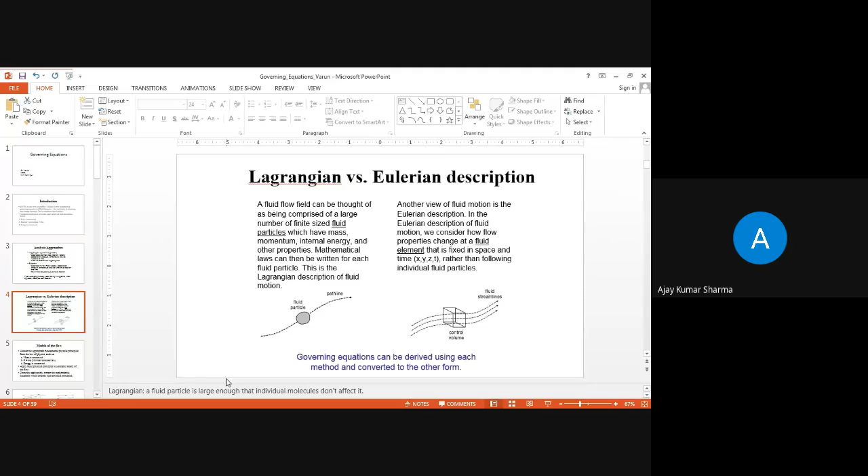In space and time, X Y Z, rather than following individual fluid particles. So these are the basic differences of these two approaches by which we can analyze our fluid.

So models of the flow choose the appropriate fundamental physical principles from the laws of physics, such as mass is conserved, Newton's second law, energy is conserved. Apply these physical principles to a suitable model of the flow, and from this application extract the mathematical equations which embody such physical principles. Based upon those physical principles the equation can be converted into a form by which we are able to solve.

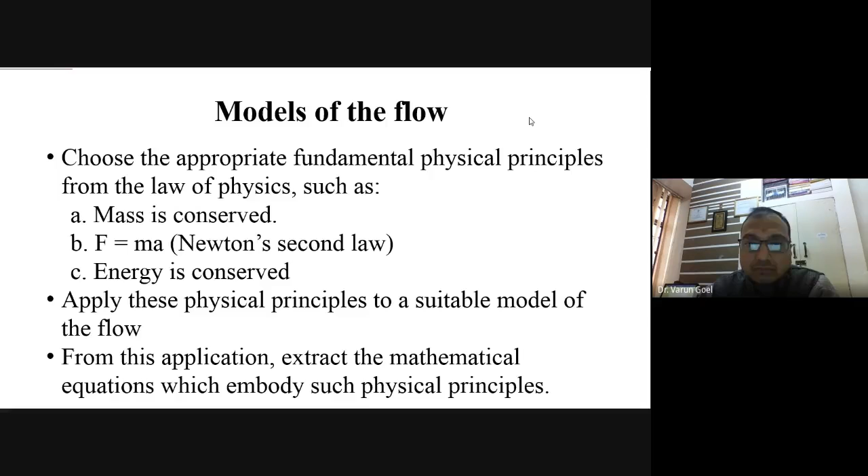So these are basically 4 models. Based upon these 4 models, we are able to solve or model our physical phenomena into a set of mathematical equations.

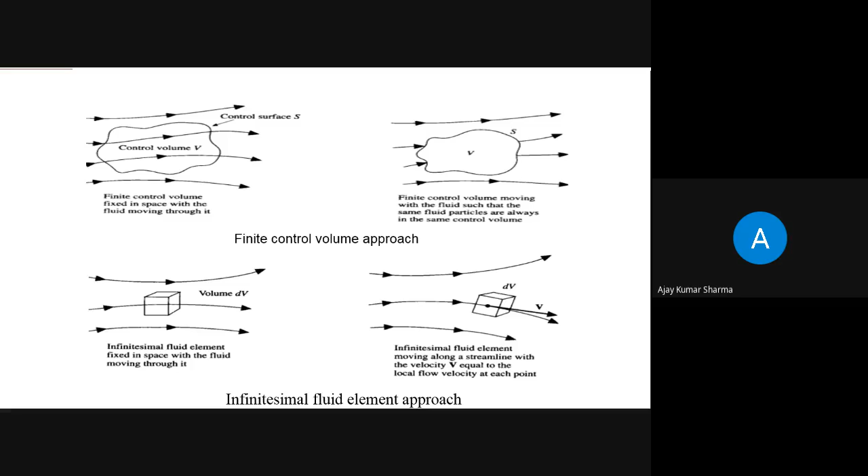Please write, anybody having any idea? Mr. Manoj P. Mahore says integral as domain irregularities can be captured. Okay, let's discuss.

So you can use both the methods, but integral form of equation is generally considered the pure form of equation, because in the differential form there is an assumption that the function is continuous and differentiable. So if at any place a discontinuity is there, our differential equation will lead to certain errors. So we can say the integral equation is valid even when discontinuity is there.

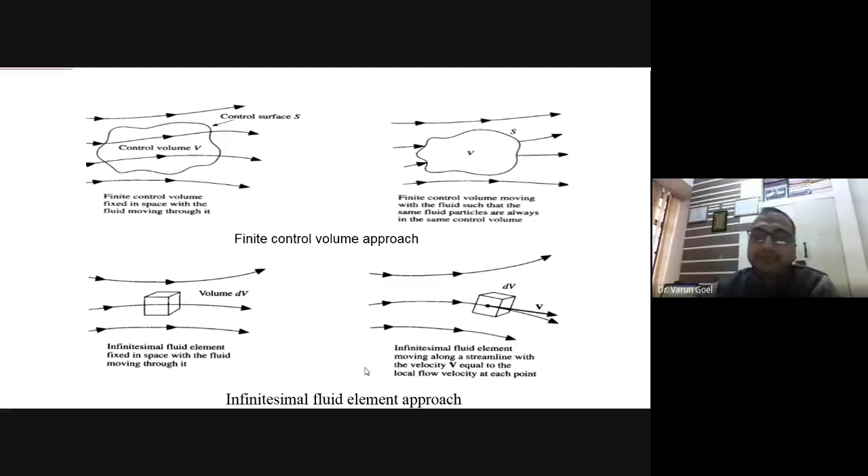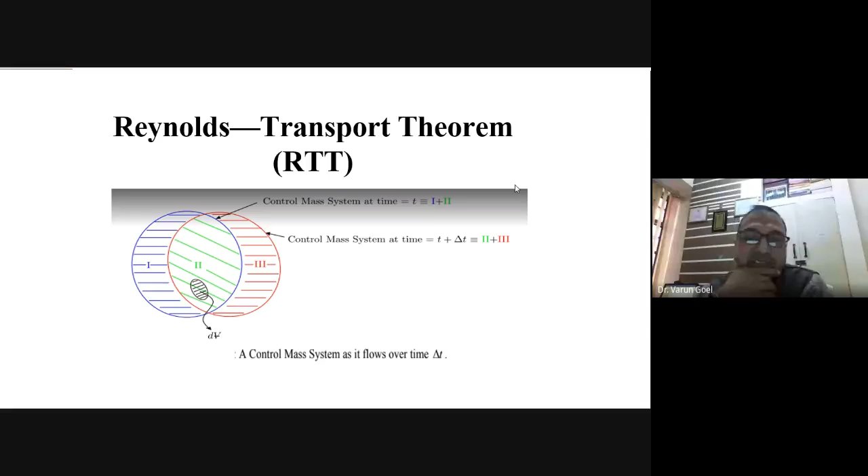So normally we can say the Reynolds transport theorem is a method to convert one form of system into another. So that is the Reynolds transport theorem.

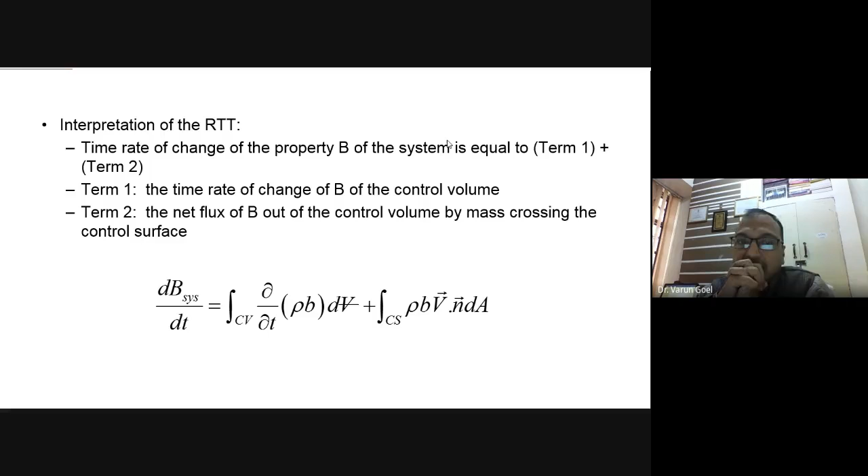If you say an interpretation of that, the time rate of change of the property is equal to term 1 plus term 2: the time rate of change of that property B of the control volume plus the net flux of B out of the control volume by mass crossing the control surface. It means the net rate of change of any property in the system will depend upon the time rate of change and the net flux crossing the control surface.

That is how we derive the continuity equation: the net mass flow out of the control volume through the surface is the time rate of decrease of mass inside the control volume. Whatever mass is coming out from the control volume is equal to the time rate of change in the mass inside the control volume.

So for different models, we have different representations of these equations. The net mass flow out of the control volume through surface S, which is the time rate of decrease of mass inside the control volume, is del by del t of a volume integral of rho dv plus surface integral of rho v dot ds, equal to 0. These equations are more or less the same thing, but written differently.

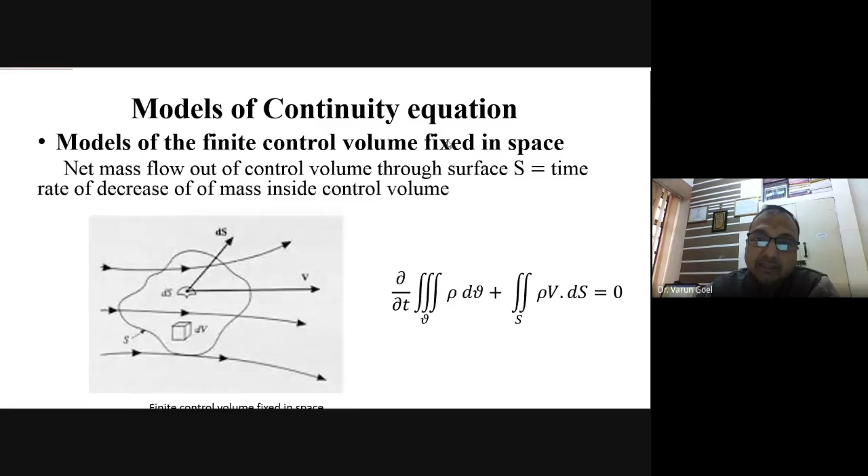So one is the integral form, a conservation form. Another is the integral form in non-conservation form, which is capital D by D t, a total time derivative of the volume integral rho dv, equal to 0. It means the net rate of change in the mass is equal to 0. Then we have the conservation form: del rho by del t plus del dot rho v equal to 0, in differential form, conservation form.

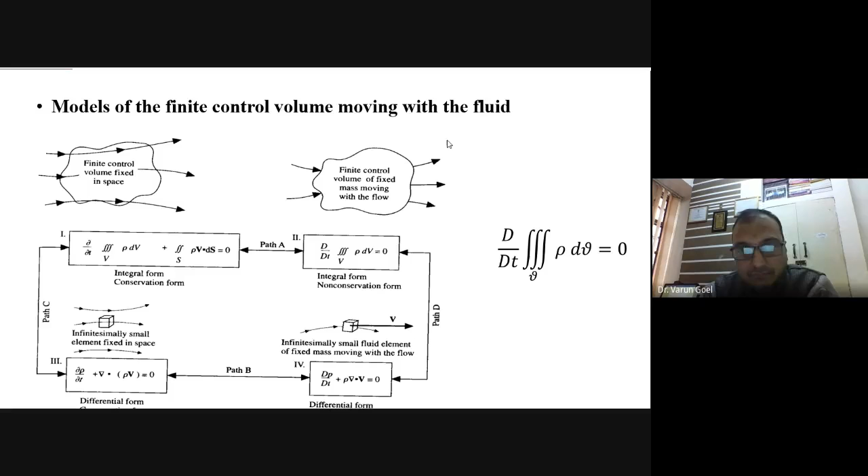Then we can say D rho by D t plus rho del dot v equal to 0, which is in the differential non-conservation form. We can convert between them by doing certain manipulations of the terms, and depending upon our choice, we can program these particular equations.

So if you write del rho by del t, you can simply add up all these components, and say all these changes are equal to 0. Then we get this type of equation, del rho by del t plus del dot rho v equal to 0.

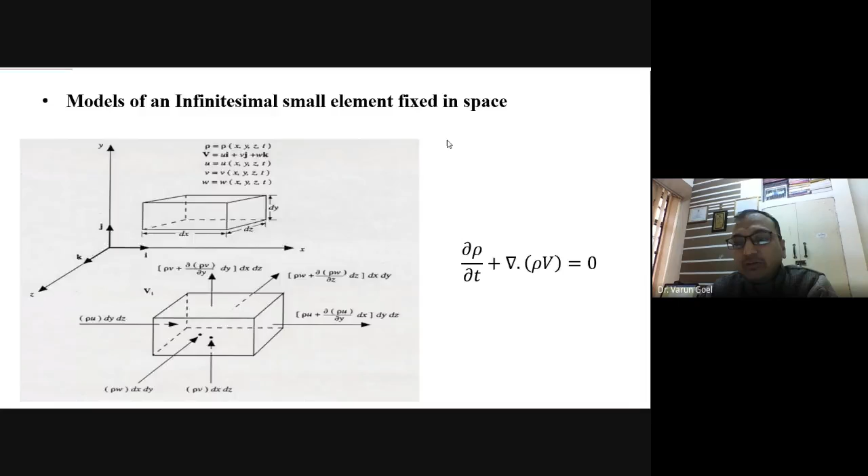If we go by the change in delta mass, the total derivative for this change in delta m will lead to this capital del rho by del t. So this is how we derive these generalized continuity equations. We have represented them in 4 forms for different models, depending upon whether the control volume is fixed or moving, or a small infinitesimal element is fixed or moving. Based on that, we can find out these equations.

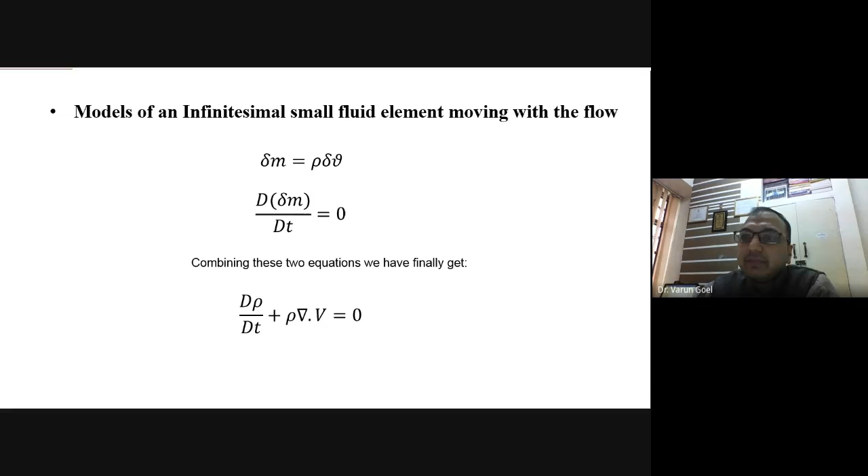And again, when we are interested in solving those equations, we will use them as per the requirement. Now, the momentum equation. Just a minute.

So now the momentum equation - we have to come up with the forces, all types of forces which are acting on a surface, which is equal to the net rate of change in rho dv by dt equal to the change in force.

So now we have body forces, surface forces, and other forces, which may act as a source - for example, if some magnetism is there, we have electric current, EMF, any other kind of force acting can also take place in this equation. The forces acting over the surfaces are called surface forces, and the forces acting over the body are called body forces.

So we know gravity is the body force. You can say pressure, stresses, and other forces depending upon their magnitude, whether they are acting on a body or a volumetric base - accordingly we have to take care. Sometimes there might be no source term, no other force, so we can neglect this F others.

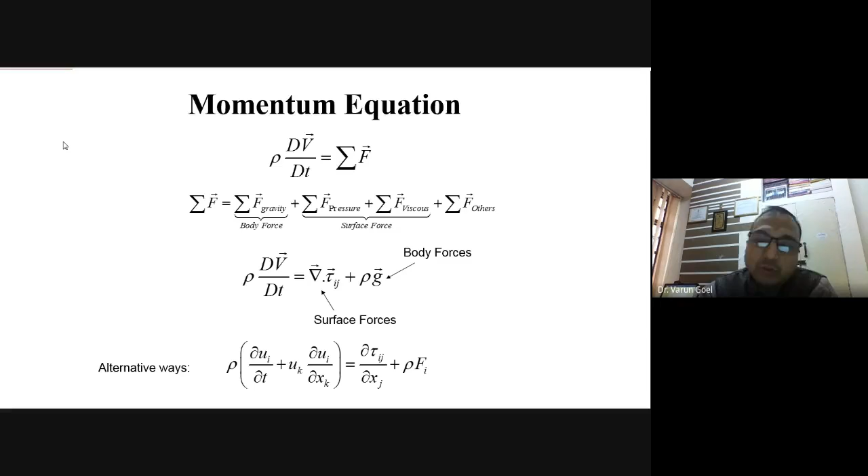So we are now in a position to get this. We can obtain these momentum equations again depending upon the conservation form or non-conservation form. In this momentum equation, our left-hand side will change, but the right-hand side remains constant always, because that is the summation of all forces which remains the same. But depending upon the different orientation, the value on the left-hand side changes. So the linear momentum equations, or Cauchy equation, provide the equation of motion for the fluid, where the stress is captured by the stress tensor sigma ij.

Now the question is, when we have this representation of terms - pressure forces, stress components - this particular component will lead to 10 unknowns. If you see, 6 stress components, plus density, plus 3 velocity independent components - and still we only have 4 equations: 3 momentum equations and 1 continuity equation.

So we cannot solve this, because ultimately we need 10 equations for 10 variables, then we can solve it. So this equation is not very useful for us. We cannot get any outcome from this particular equation.

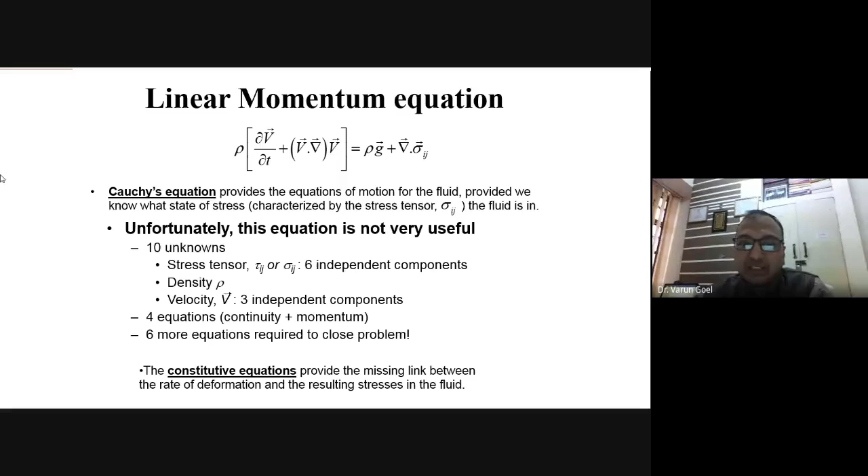So the constitutive equations provide the missing link between the rate of deformation and the resulting stress in the fluid. Now we have to make certain assumptions and try to solve it, so that we have n number of variables matched with n number of equations. Then we are in a position to solve and get the solutions out of it. Otherwise it is very difficult for us to solve, because we have 10 unknowns with only 4 equations.

So the Navier-Stokes equation, by considering Hookean elasticity and Stokes' postulates - certain postulates given by Stokes - give us certain simplification of the equations. When we simplify these equations, we get a certain form, and this form is now able to be solved with the help of these fluid dynamics equations. So the fluid is continuous and the stress tensor is almost a linear function of strain rate.

So now we can talk about Newtonian fluids. The fluid is isotropic, properties are independent of direction. When the strain rates are zero, the deformation law must reduce to the hydrostatic pressure condition. So all these can be combined and written as a single general constitutive equation.

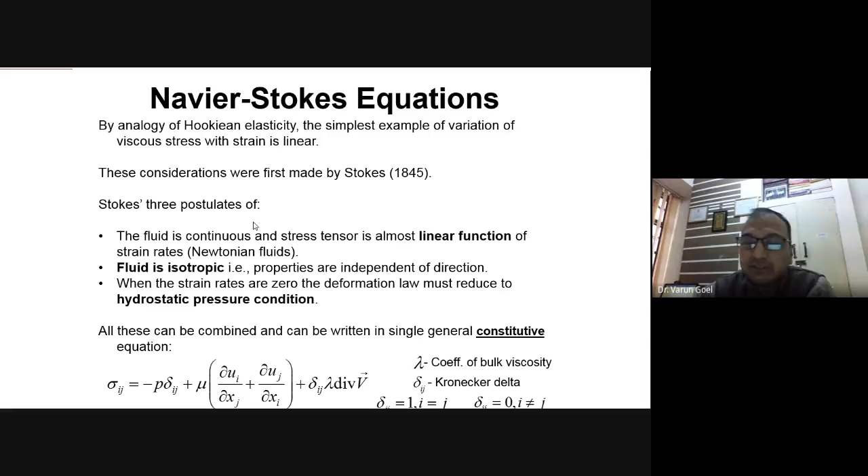So sigma ij equals minus p delta ij plus mu times (del ui/del xj plus del uj/del xi). Basically it is a mu del u by del y term, showing a linear kind of Newtonian fluid behavior. So the shear stress tau equals mu del u by del y - that is the representation. Then we have delta ij lambda divergence of v, which takes care of the Kronecker delta - that is the simplification in writing down the equations.

There are also many fluids which do not behave as Newtonian fluids. These are called non-Newtonian fluids and have different constitutive equations.

Stokes pointed out that the sum of three normal stresses is a tensor invariant and defined the mechanical pressure. The average compression stress in the element is 1/3 of that sum, meaning the mean deforming pressure in viscous fluid flow is not equal to thermodynamic pressure.

So the Stokes hypothesis is lambda equal to minus 2/3 mu, which helps simplify this equation further. When we consider incompressible fluid, the divergence of V equals 0, so the terms tend only toward the pressure term, which helps us obtain this result. The momentum equation for a general linear viscous fluid is now obtained by substituting the stress relations.

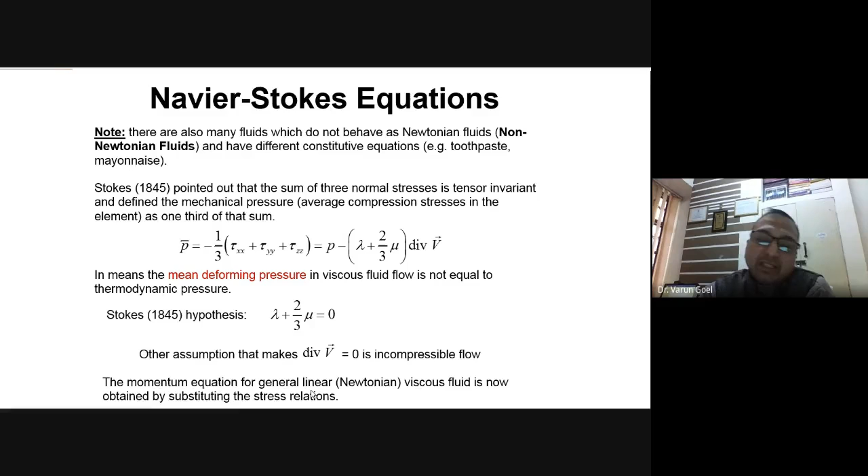In expanded form, rho del u by del t equals rho gx minus del p by del x plus del by del x of 2 mu del u by del x plus lambda divergence V, plus del by del y of mu del v by del x plus del u by del y, plus del by del z of mu del w by del x plus del u by del z. This is for the x direction.

Similarly, we can write it for the y direction and for the z direction, giving us a set of 3 equations. Now we have these 4 equations total: 1 continuity equation, and 3 momentum equations.

Again, depending upon whether the fluid is incompressible, rho del u by del t equals rho gx. If acceleration due to gravity in the x direction is 0, then it becomes minus del p by del x plus mu times del square u by del x square plus del square u by del y square plus del square u by del z square.

So by compressing these equations, this will help us get the solution more easily.

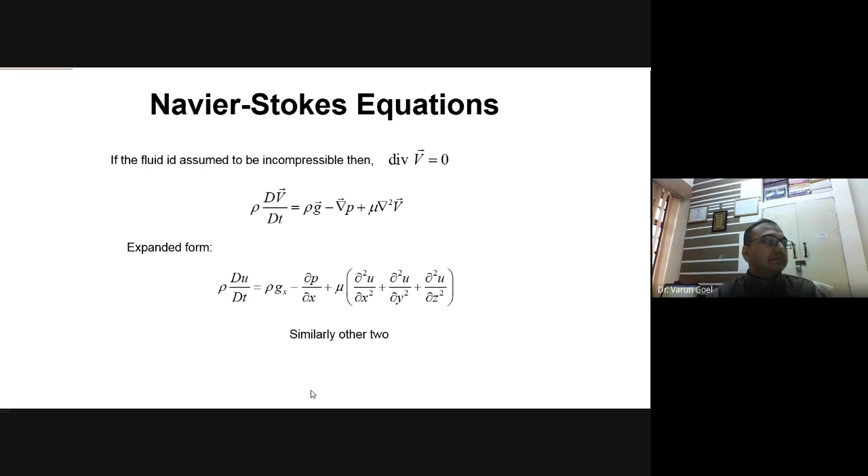Now this is a simple representation of the equation in polar coordinates, which we use when we want to solve a problem in a polar system or a pipe case. At that time we are able to solve it.

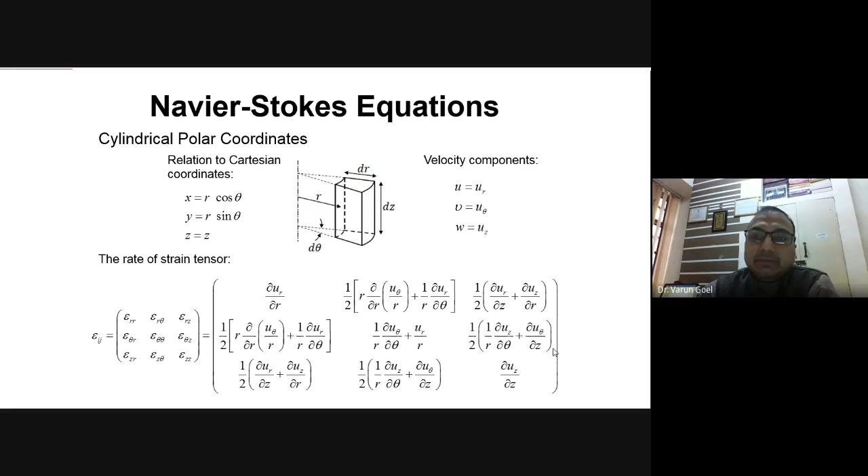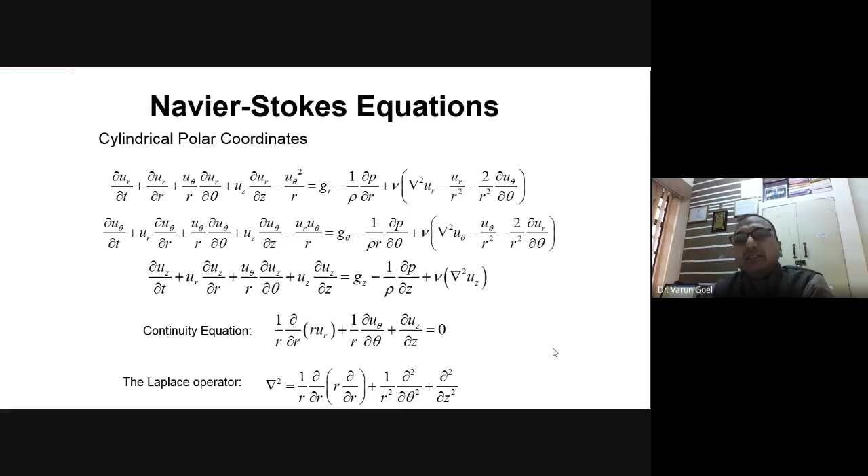So that is the rate of strain tensor. Then we have the components ur, u theta, and uz - these are the 3 components. Then we have the continuity equation for polar coordinates, and with the help of this set of equations, we are able to apply them in a polar system.

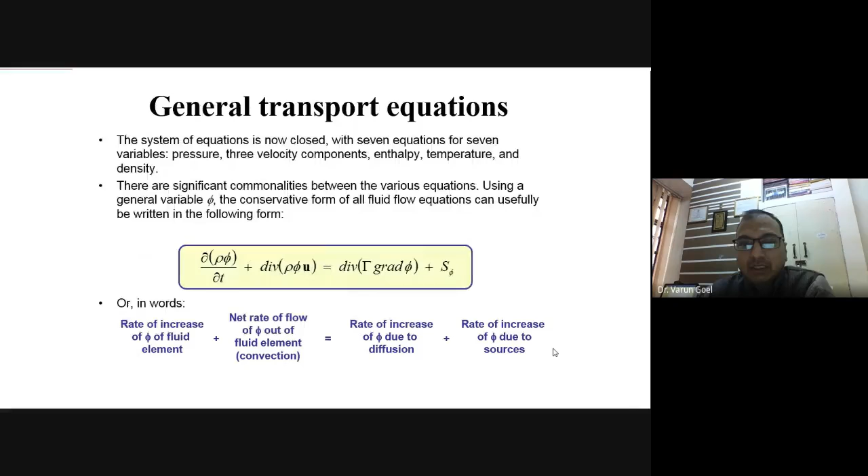Now again, we can use it for the spherical system. So now let's discuss the energy equation.

The rate of change of energy inside a fluid element is equal to the net flux of heat into the element plus the rate of work done on the element due to body and surface forces.

So the rate of change of energy inside the fluid element - that energy can be represented in terms of enthalpy or internal energy, whatever form. The net flux of heat is represented in terms of temperature.

So when we introduce this energy equation, it brings in one more term - temperature. So the number of equations increases by 1, but the number of variables also increases by 1. So if sometimes we are not interested in thermal analysis or temperature-based energy analysis, we can use the fluid dynamics set of equations for continuity and momentum only.

But when we include this energy aspect, we are dealing with temperature and the rate of work done on the element due to body and surface forces - what amount of work is done with the help of these forces. If I talk in terms of shear stresses, then we can determine the amount of work done from that.

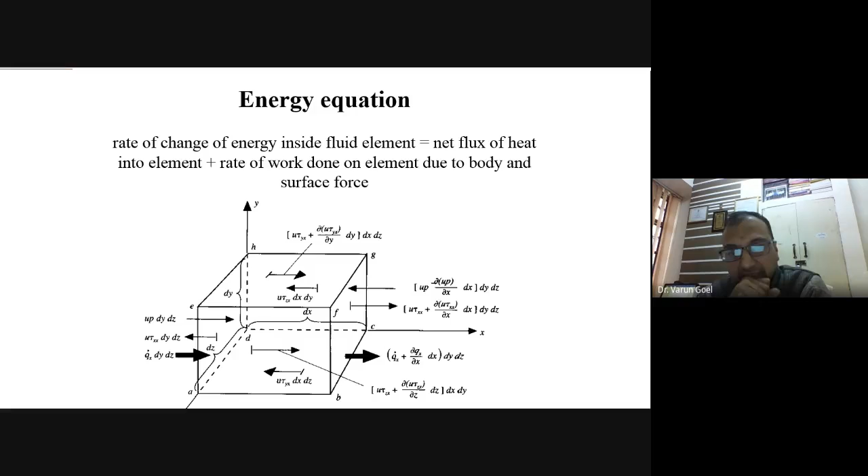So now we have internal energy or enthalpy represented, along with the heat flux. If q dot x is entering, then q dot x plus del qx upon del x into dx is leaving from that particular surface. So considering entering and leaving, when we balance all of this in all 3 directions, we add these up, and the resultant is equal to the energy equation.

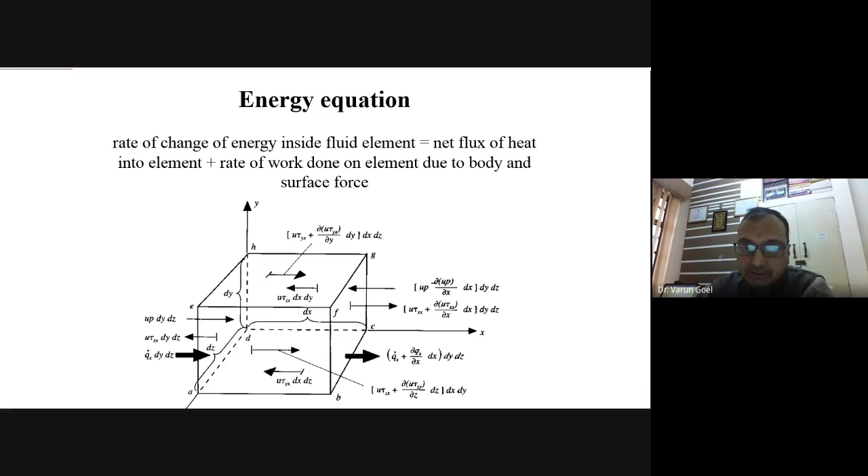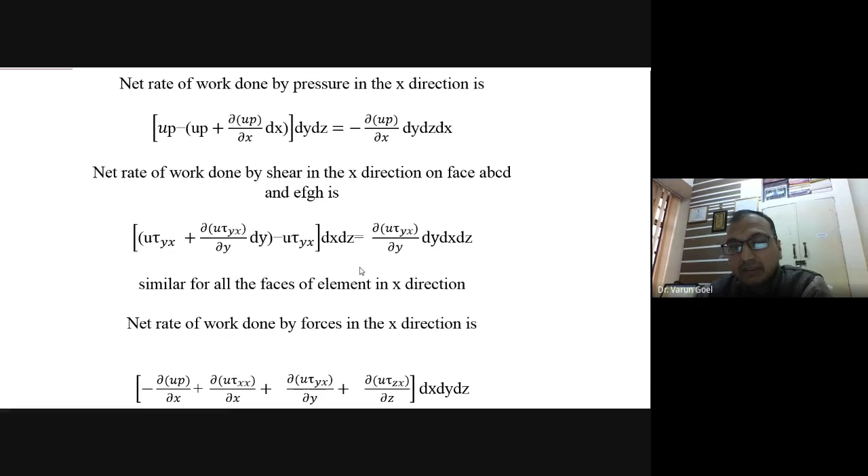So net rate of work done by pressure, you can see in terms of pressure and in terms of shear. We can say work done by forces is again del upon del x of u tau xx, tau yx, and tau zx. These represent the force, the work done by the forces in the x direction. Similarly, in the y direction.

Similarly, we can say del by del x of up, vp, that is u, the velocity in the x direction, y direction, and z direction. Then we have tau xx, tau yx, tau zx, multiplied with u. Then we have tau xy, tau yy, tau zy. Similarly, we have these components of force work done obtained by these forces.

Then we have the net flux of heat into the element, say qx. From Fourier's law, qx equals k dt by dx. When we say del x of qx, it means del by del x of k dt by dx. If k is not a function of temperature, we can write k del square t by del x square. Otherwise, we write del by del x of k dt by dx plus del by del y of k dt by dy plus del by del z of k dt by dz.

So now we have all the heat flux entering. Now, the rate of change of energy inside the fluid element, which is moving, has an internal component of its energy plus a kinetic or potential component. So we see rho del by del t of E plus V square by 2, where V is the velocity component, and E can be represented in terms of temperature only.

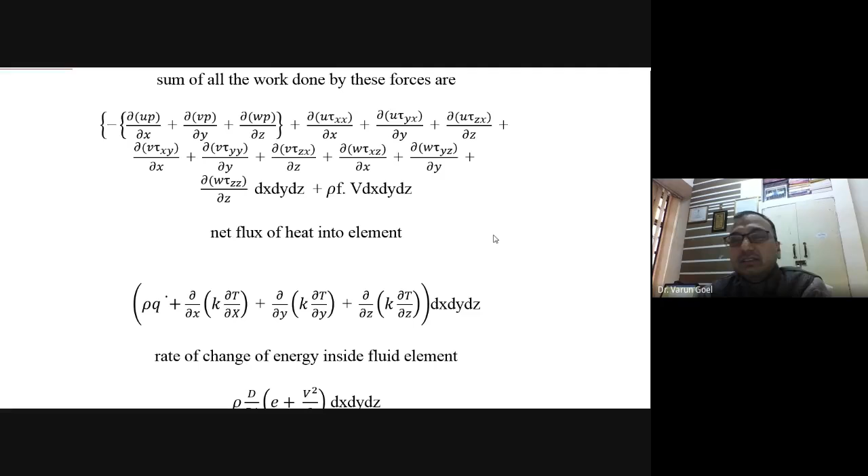So the rate of change of energy inside a fluid element equals the net flux of heat plus the work done, and with this equation you get the generalized energy equation. That is, rho times total derivative of del by del t of E plus V square by 2 equals minus del up by del x plus del Vp by del y plus del Wp upon del z plus del u tau xx upon del x. So go on expanding these terms.

Again, we make certain assumptions, considering k to be isotropic, otherwise it would be kx, ky, kz. When k is not a function of temperature, k comes out and it is simply written as a Laplace equation: del square t by del x square plus del square t by del y square plus del square t by del z square. Depending on our physical problems, we can derive more simplified forms of these equations.

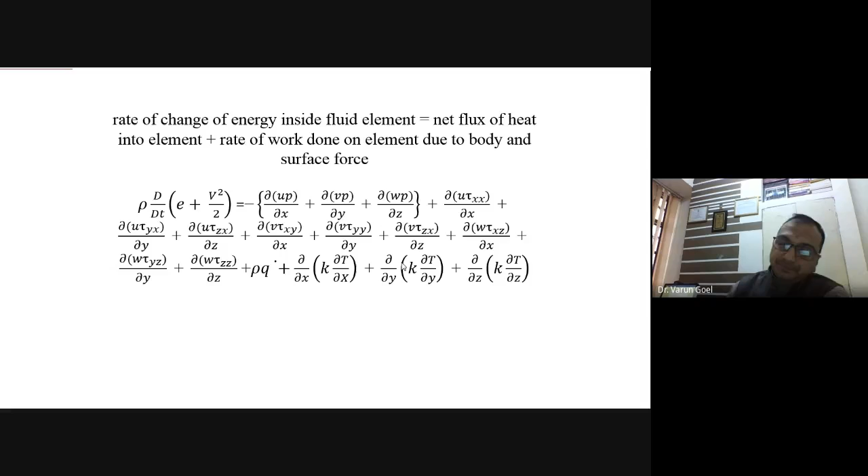Otherwise, these generalized equations are quite complicated and quite big, and they form a nonlinear set of equations. As we have seen in the momentum equations, if we don't assume any approximation for the stress component, we cannot move ahead toward a solution. So we have to come out with certain approximations, and these lead to the Navier-Stokes equations. Now, depending on those, we have to solve these Navier-Stokes equations, again depending on our physical problem.

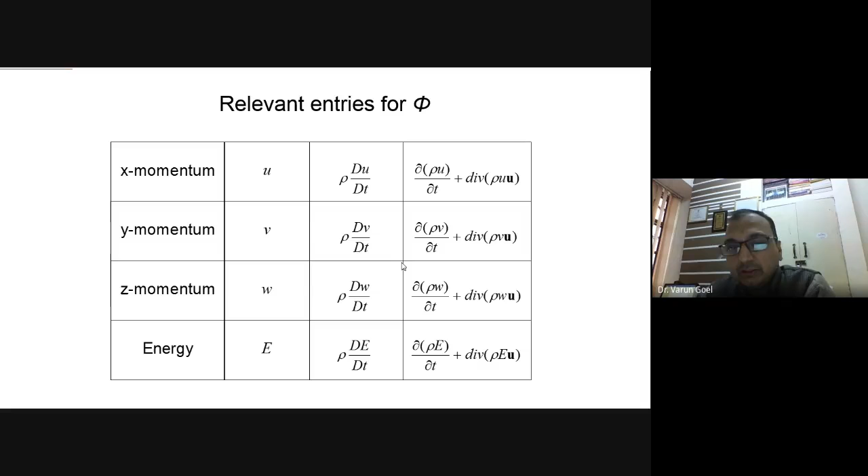So these are just representations of some terms which you can write down. If you represent rho del u by del t, rho del v by del t, rho del w by del t, rho de by dt, it just tells you that if you simply change the parameter u, v, w, e, the rest organization of the equation remains the same.

So one more type of equation is the conservation of species, which is quite useful when we are dealing with species. Consider the control volume. Species may be transported by advection with the mean velocity of the mixture and by diffusion relative to the mean motion in each of the coordinate directions. So these are the advection and diffusion of all these.

Let's suppose a species, if we talk in terms of gases, a mixture of carbon dioxide, a mixture of gases, and we are interested in analyzing the diffusion of the concentration of the different gases, or sometimes their chemical reactions.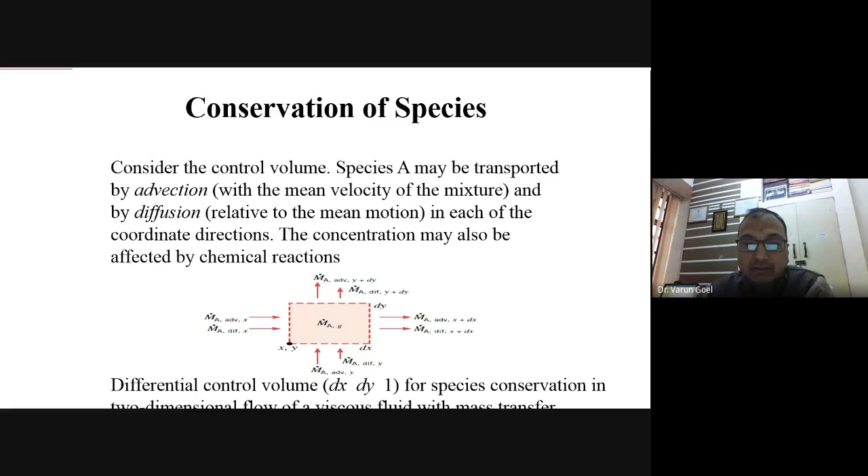At that time, we are interested in getting this generalized equation and analyzing these equations also in correspondence to those equations which we have studied.

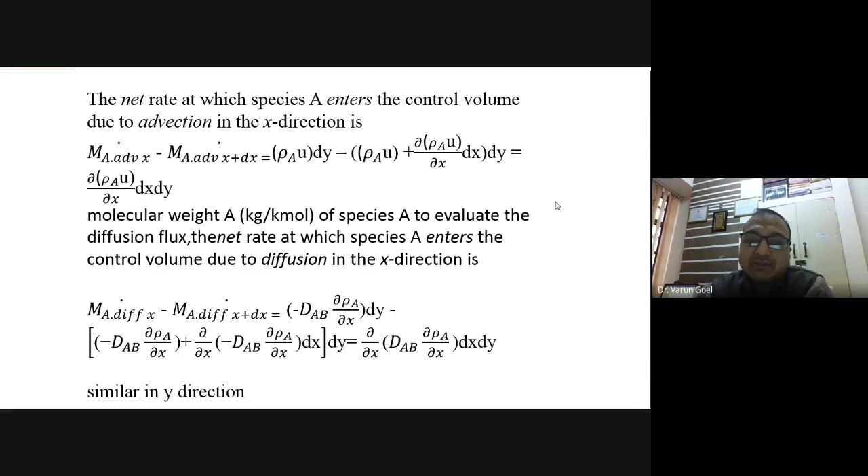So the net rate at which species A enters the control volume due to advection in the x direction is this much, and molecular weight of a species is used to evaluate the diffusion flux. So normally these equations are represented in terms of their molar volume or per unit molecular weight, so that they give us good uniformity in mass conservation.

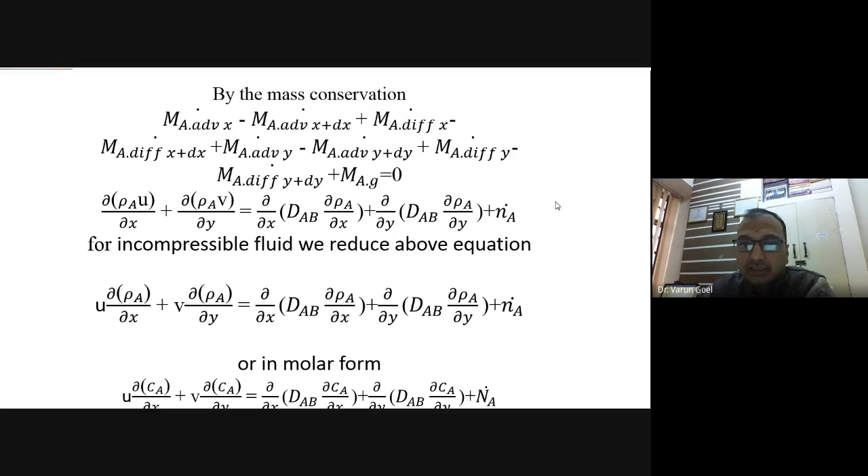So you can say u del rho a by del x plus v del rho a by del y, that is DAB, which is the diffusivity, or you can write them in terms of their molar form.

So again, we have this simple representation of the equation. If we represent these equations in four terms, which you can say are unsteady, advection, diffusion, and source, and you try to see how the equation will look like, are these equations easy to remember?

So that is the unsteady term. It is del rho by del t for the continuity, and for the momentum, del u by del t, del v by del t, del w by del t. Then we have this advection term.

In continuity, we don't have diffusion, but in source, we have nothing. But in diffusion, all these Laplace sort of formations, del square u by del x square plus this, represent the diffusion. And again, some external things.

It means source, here you can say your 1 upon rho del P by del X. But again, we may have any other source which is there. Let's say anybody is there - if we are studying the flow of fluid over any surface and somebody is standing there to disturb the fluid, basically that acts as a source. If anybody is moving a rod there, these types of things we have to take care of, and these will act as a source. These sources are basically now changing the pattern of your fluid flow.

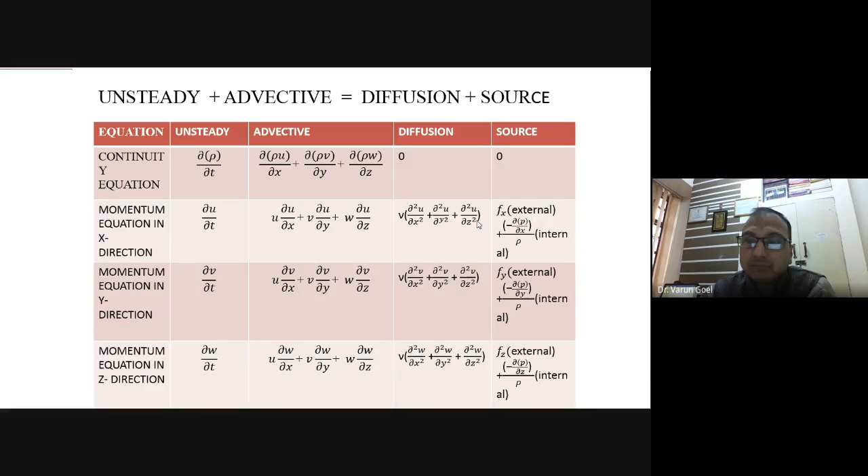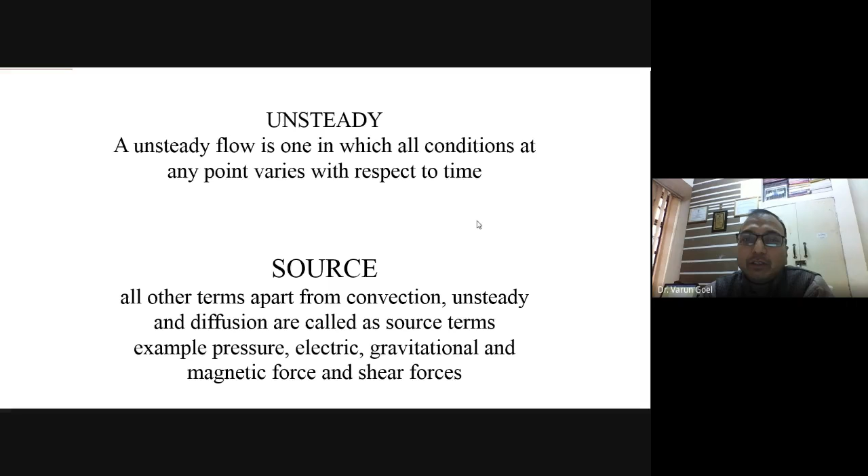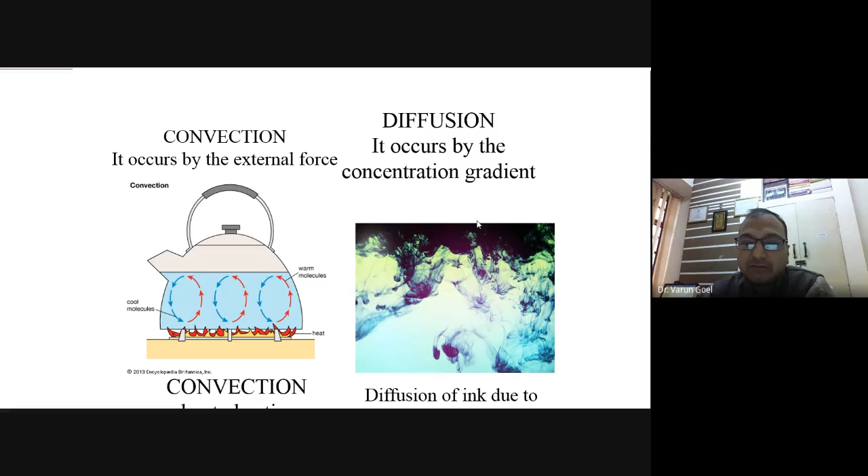So just a minute, I will show you the continuation of this - how do we come out with, you can say, now how do we convert these governing equations into the algebraic form.

Now we know what fluid dynamics is, and we know these generalized equations. Now the thing is, how do we get these generalized equations into algebraic form, from where the computational part starts? So normally there are three methods for study of flow phenomena - commonly they are analytical, experimental, and computational.

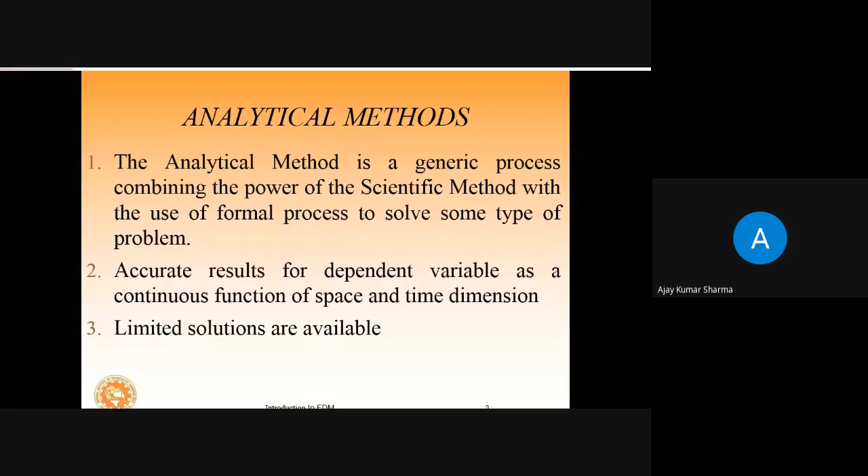So the analytical method is a generic process combining the power of the scientific method with the use of formal process to solve some type of problem. It gives accurate results for dependent variables as a continuous function of space and time dimension. Limited solutions are available - so basically analytical solution is very good, we even need them, they are accurate, but the problem is they have limited solutions.

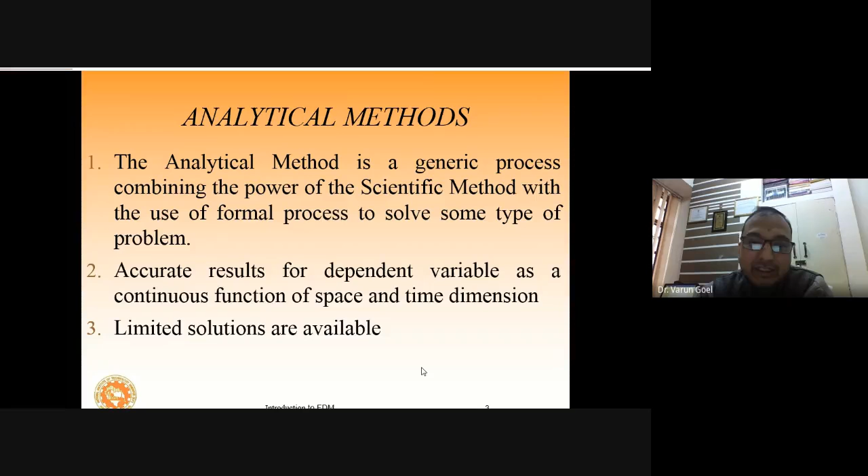Experimental methods are always useful, but they are costly. Computational methods are becoming prominent with development in hardware - results at discrete points, and a large number of points can be taken. Results depend on accuracy of the model, and there are difficulties in modeling.

These partial differential equations, applicable continuously for all the points in the domain, need to be converted to difference equations applicable at discrete points within the domain. In this presentation, we will discuss discretization. Suppose we have differential equations, and our objective is to convert that generalized governing equation into a set of algebraic equations so they can be solved. That is what CFD, computational fluid dynamics, is about. How do we make it easy to do computation with the help of these equations?

Suppose we have a nodal point, represented by ij, and we are clustering points. Let's say we have a physical system, and we are interested in getting the solution for this system. So what we do is make them discrete points. Over these discrete points we are able to solve our equation, and we get the solution for these discretized points. But there's a problem: if we connect point to point, they will not vary linearly. If I join them linearly, they might be non-linear in nature. So we can choose these points depending upon the requirement of the grid.

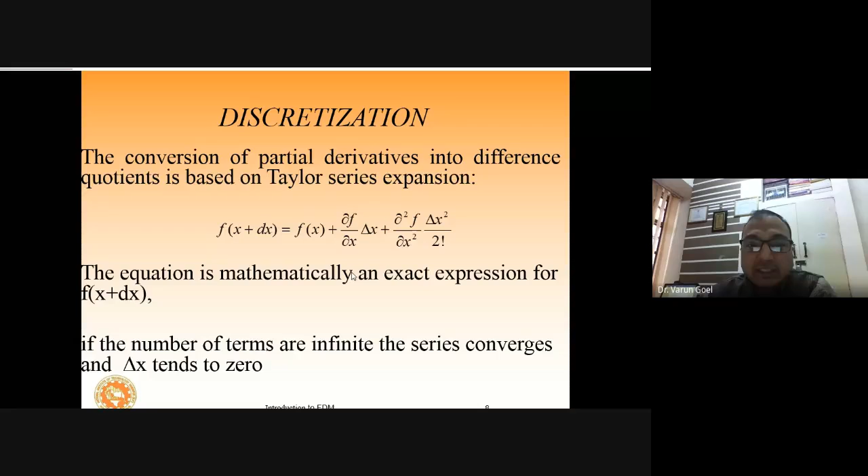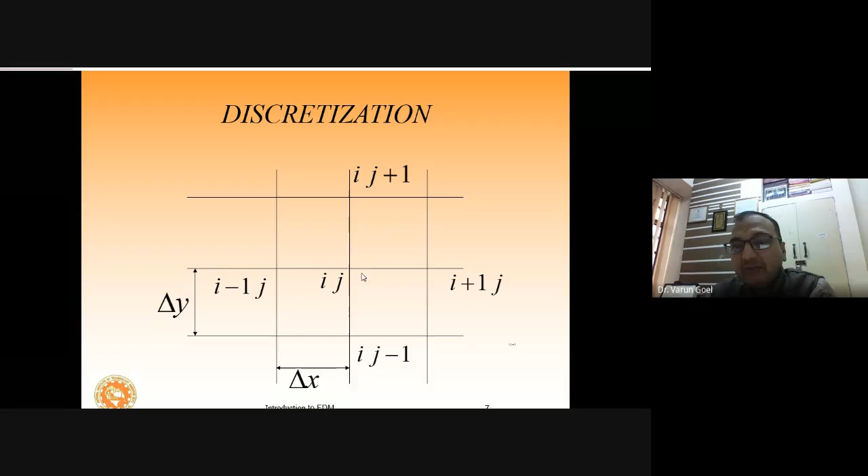If I represent these terms into i and j: i plus 1,j; i minus 1,j; i,j plus 1; and i,j minus 1, along with ij itself, I can use the Taylor series to evaluate these values. I can say u(i plus 1,j) equals u(ij) plus del u by del x at ij into delta x, plus del square u by del x square at ij into delta x square upon factorial 2, plus del cube u by del x cube, and this equation goes on.

Now suppose I am interested in calculating a first derivative, simply del u by del x. So del u by del x equals u(i plus 1,j) minus u(ij) divided by delta x. If I address the remaining terms: del square u by del x square times delta x by 2, minus del cube u by del x cube at ij times delta x square upon 6, that is factorial 3, and so on. So del u by del x is nearly equal to u(i plus 1,j) minus u(ij) upon delta x. It means when I go on considering this...

I am introducing certain error here, because del u by del x is only approximately equal to this expression. It is not exactly equal to this; it is actually equal to this plus the remaining terms, which are also there.

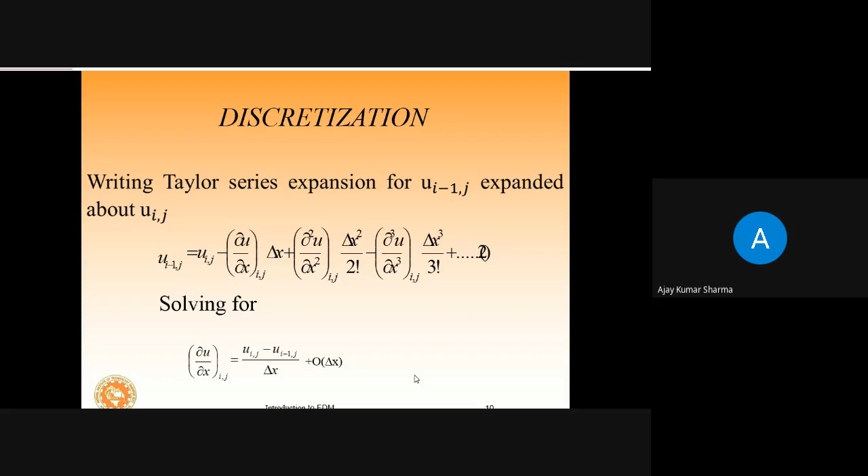So we can say u i minus 1, j is equal to u ij minus del u by del x ij into delta x, plus del square u by del x square ij, delta x square upon factorial 2, minus del cube u by del x cube.

So now if I'm interested in del u by del x, I can say u ij minus u i minus 1, j, upon delta x, plus this. Now these are equal, but certain terms induce error in this kind of discretization. But it depends upon our selection of delta x. If delta x is really tending towards 0, very small, then this error is very less.

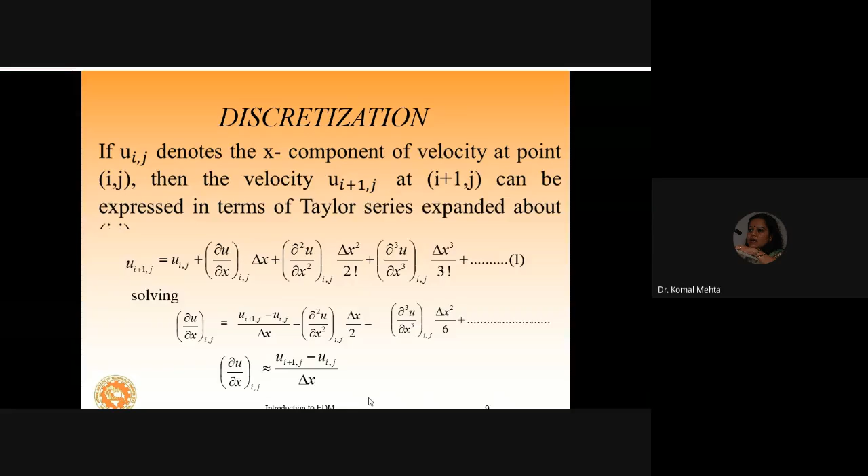Now if you subtract both equations 1 and 2, you get u i plus 1, j minus u i minus 1, j equal to 2 times del u by del x ij, delta x, plus del cube u terms. So here one term, del square u by del x square, is eliminated from the equation, and now you see the term O(delta x square). Initially it was in terms of delta x, so we can conclude the order of error there is delta x, but here it is delta x square, so it is a bit more accurate.

So depending upon these equations, they are called forward difference, backward difference, and these are called central difference. With the help of this, you are able to find out the first order derivative.

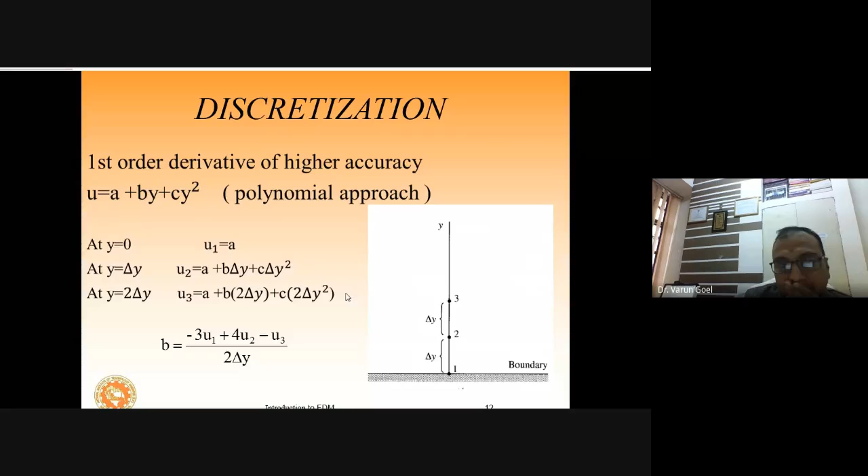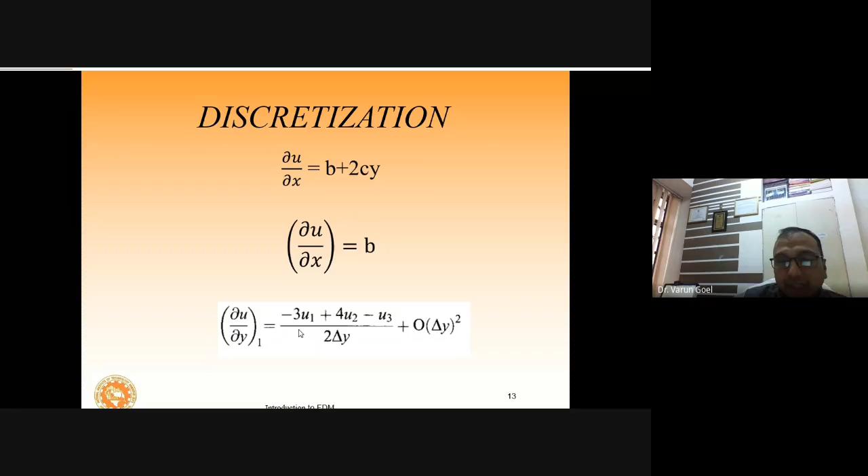Similarly, if we are interested to obtain higher accuracy, we can go by a polynomial approach. We can fix the values, and based upon this we try to find out these A, B, C coefficients. When we find these, these terms will induce more terms, U1, U2, U3, as we are getting only two terms. So with the help of these, we increase the accuracy when we try to solve these equations.

Now, the second order derivative for this: del square u by del x square, ij, you can say u i plus 1, j. Let's suppose when we talk about this, we have i plus 1, we are interested in this value. So what we can do, we can cancel this term. So what we do?

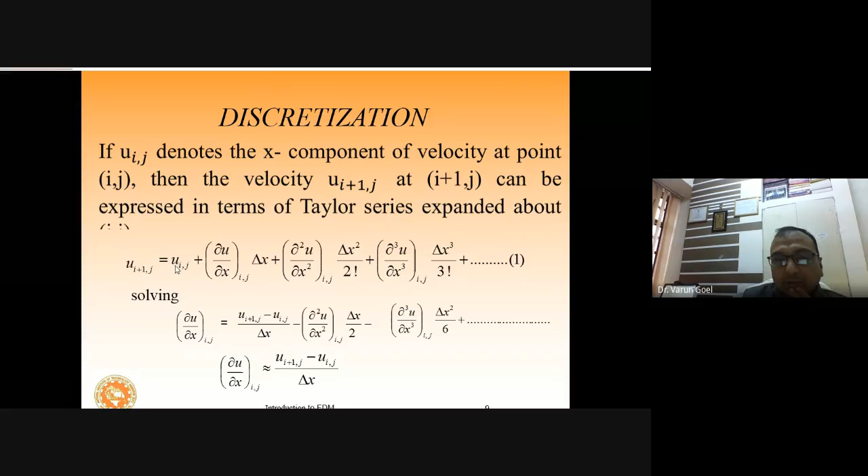We can simply add them, so that it becomes 2. So it becomes 2, and this becomes u i plus 1, j, that will become u i minus 1, j. So you can say u i plus 1, j plus u i minus 1, j, minus 2 times u ij, divided by delta x square, and the error here is of second order.

Now you can say with the help of this, you are able to get this second order derivative, which will help us in converting the differential equations or generalized equations in terms of these points.

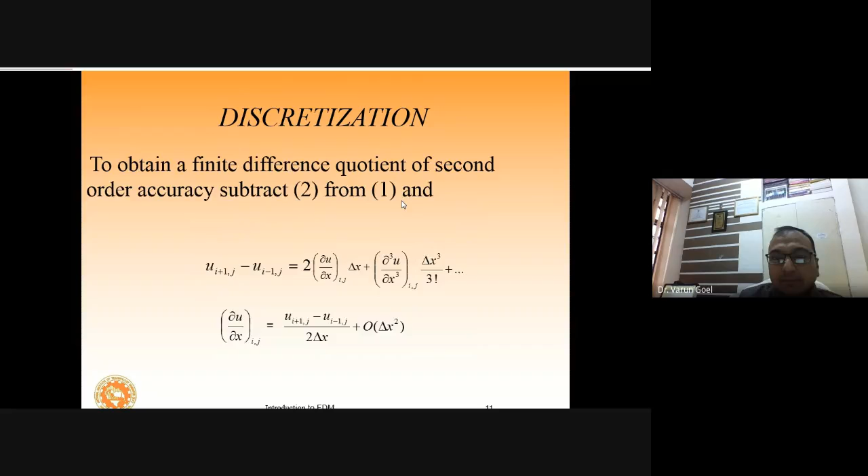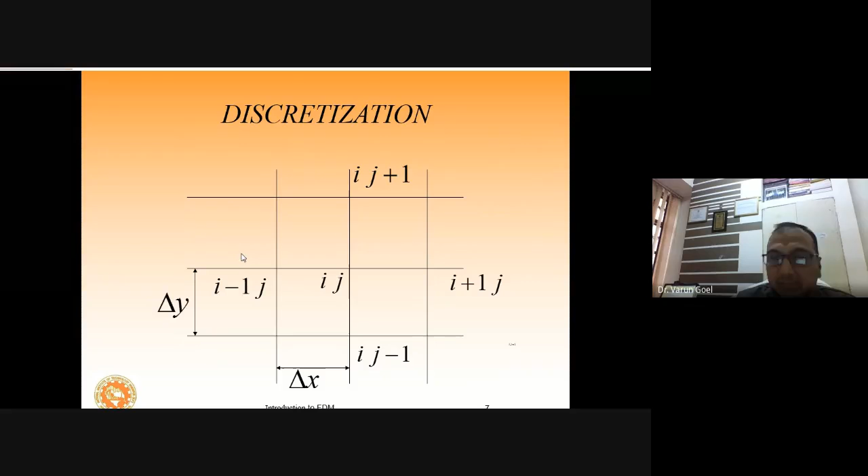You can say the whole equation can now be written as u ij plus 1, u ij, u i minus 1 j, u ij minus 1, u i plus 1 j. Similarly, v ij plus 1, v ij, v i plus 1 j, v ij minus 1. Similarly for pressure, density, and temperature. If there is a 3 dimension, you can say i, j, and k, so it is u ijk or u ij plus 1 k, like this. So all the parameters will now be denoted at these nodal points and the values assigned here.

If you want to increase the accuracy to the fourth order, you will see how many complications arise in this particular equation. But it will lead to fourth order accuracy. So ultimately, as complications increase, accuracy improves. But we have to be conscious that we are able to solve them.

Because ultimately we don't know these values, we will iteratively solve them. Will our procedure lead to achievement of this particular solution or not? So we cannot make our set of discretizations very complicated, otherwise it will lead to problems in the CFD techniques which help us obtain the solutions. Because when we get this discretization, then we can say we study the CFD techniques.

So let me take a simple example of a 1D unsteady heat conduction equation: del T by del t equal to alpha del square T by del x square. Now you simply see del T by del t.

That is T at j, n plus 1. Here you see one more term: temperature is varying with respect to time, so we represent that as a superscript. The subscript is for dimensional things, x, y, z. Here n plus 1 denotes time. So the variation dT over dt is T at n plus 1 minus T at n,

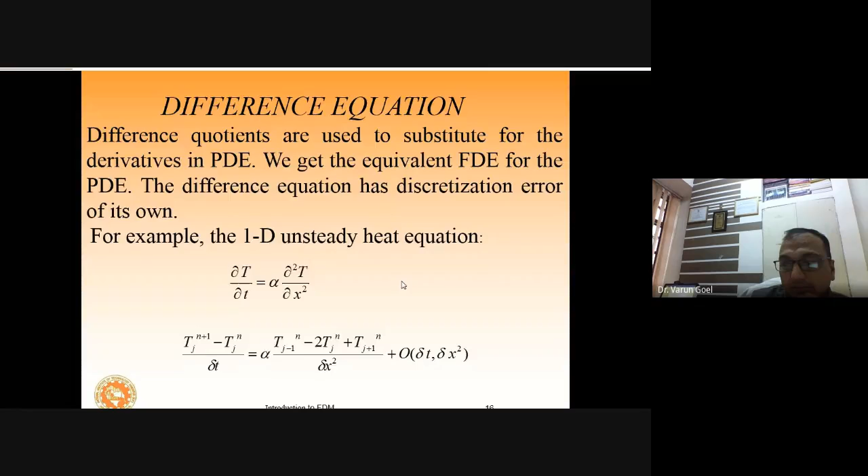Now that is all. We get a difference equation or algebraic equation. It is this finite difference equation that is actually solved instead of the partial differential equation.

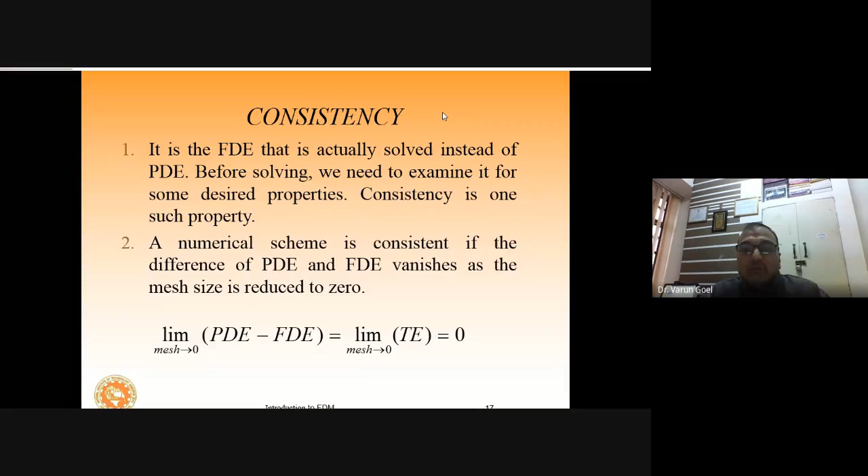But before solving, we need to examine it for some desired properties: you can say consistency, stability, and there are many more terms which help us determine whether our solution is converging or not. That is the main thing.

So, convergence: generally a consistent, stable scheme is convergent, and convergence here means that the solution to the FD equation approaches the true solution to the PDE, having the same initial and boundary conditions, as the mesh is refined.

So we can do an error analysis. You can ask how many sources of error are introduced. One error we have already introduced is the discretization error, the difference between the exact analytical solution and the exact solution of the corresponding difference equation.

The second type of error is the rounding off error, which is introduced in calculations. When we have certain values, we round them off, and this rounding off leads to error inside the results. Sometimes your solution starts diverging.

At that time, it's very difficult to see what is going on; we're not able to get the solution. My solution, which needs to converge, instead starts to diverge. It means the error is increasing iteration by iteration, and the magnitude of both errors becomes so enormous that we are not able to get any converged solution.

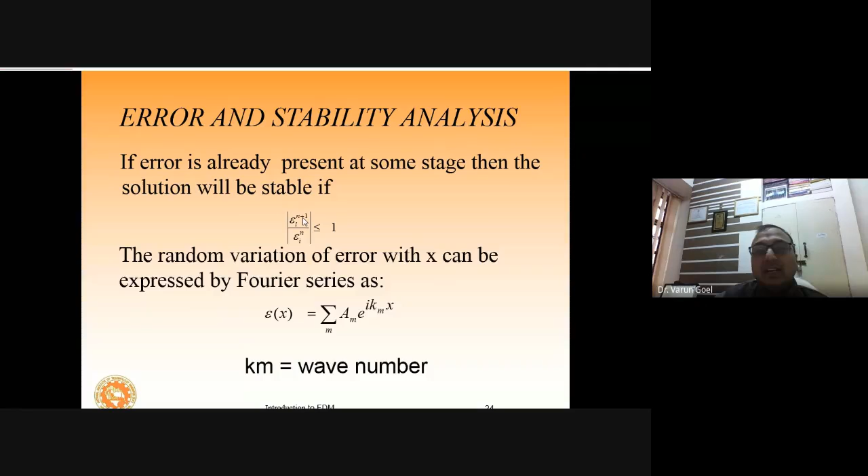If error is already present at some stage, then the solution will be stable if the error is not growing, i.e. if error is reducing. It means epsilon at i, n plus 1, should be less than epsilon at i, n. This can also be represented with the help of Fourier analysis.

Based on that, we get certain criteria which restrict our time step or our spatial step delta x. So if you keep alpha delta t upon delta x square less than or equal to 1/2 for a 1D heat conduction problem, then your solution will converge. And if your delta t is greater than that, then your solution will not converge.

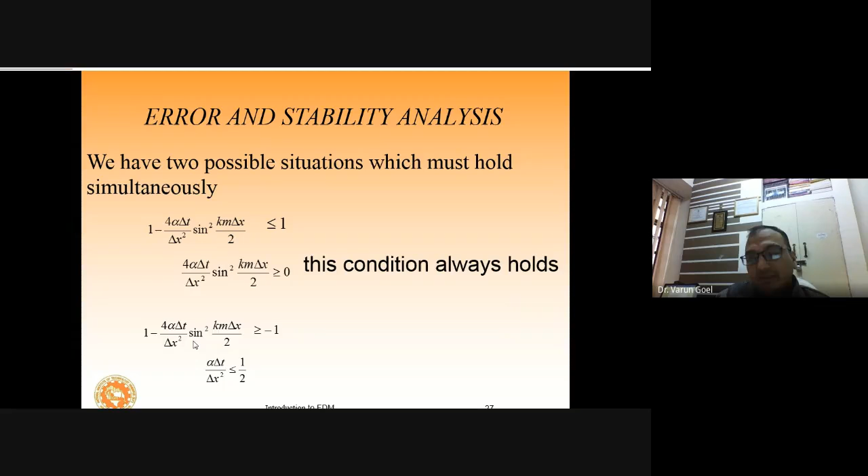Or we have to choose another method. We can say, okay, we can go by the implicit approach, because till now what we are doing basically, at this time level n plus 1, rest solutions are at time level n. It means we are marching towards the time at n plus 1 level when we are having at time level n. So again, we have to choose the scheme depending upon our solution method, which equation, which method or which scheme is desired for such kind of a scheme.

So you have now two solutions. If you see simple thing, whether you are interested in these, you know these three values, and you try to obtain this one value. Either you write your scheme depending upon three unknowns and you know the one value.

That is the difference between explicit and implicit schemes. If you know all these three values, that is called explicit, and you are marching in the time direction. You know all the values at time t n, but you don't know the value at the single value at n plus 1. So you know these three. With the help of these three, you can calculate this. With the help of this, you can calculate this. With the help of this, you can calculate this. And like that, you will calculate all the solutions at the n plus 1 level.

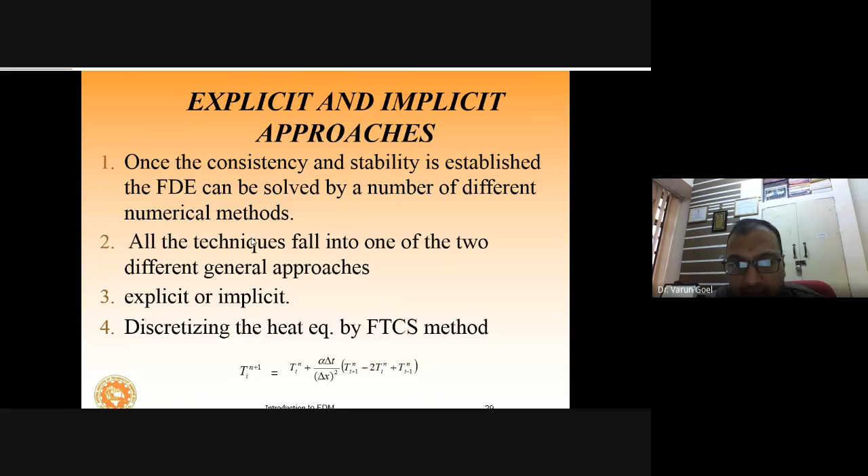So implicit and explicit, first of all, then we will go through. If you see here, this equation is Ti n plus 1. If I go on here, this Ti n plus 1 minus Ti n for this particular equation. Let me have this equation: del T by del t equal to alpha del square T by del x square.

Now, when we have this kind of term, you can say your time is at Ti n plus 1, because when you have dT by dt, the time level is one step ahead, that is n plus 1, minus Ti n upon delta t, that equals alpha upon delta x square times Ti plus 1 n minus 2 Ti plus Ti minus 1 at n.

Now if you see, if I replace this n with n plus 1, let's say Ti n plus 1 minus Ti n divided by delta t equal to alpha delta x squared times Ti plus 1 n plus 1 minus 2 Ti n plus 1 plus Ti minus 1 n plus 1. I can write any one, either for the next time step or the previous time step.

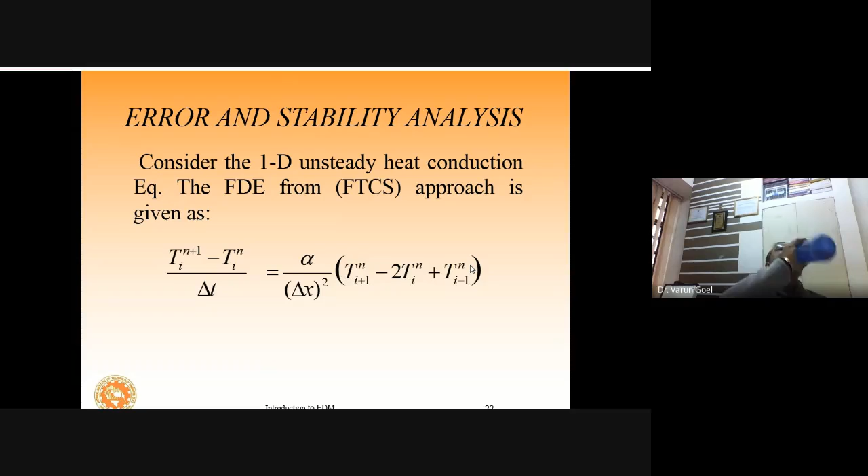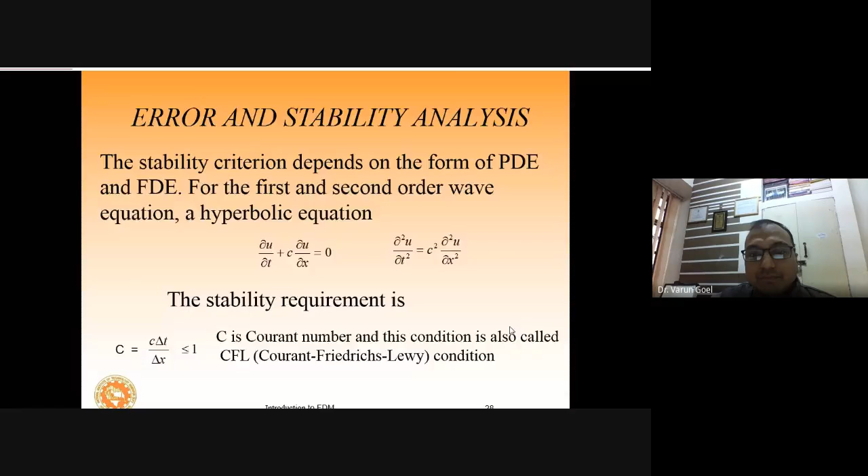So now when you see here, in this particular case, if I talk of the explicit one, because I am having Ti plus 1, Ti minus 1, so at the nth level, this is my nth level, and I am moving towards n plus 1, and I am getting this value.

So if I am interested in Ti at the n plus 1th level, it means I know all these three values, and with the help of these three values, I can obtain the solution for Ti at the n plus 1 level. Similarly, when I go on increasing these values, I can obtain 2, 3, 4, 5, 6, 7. When my T'th at n plus 1 is over, I can move towards the n plus 2 level.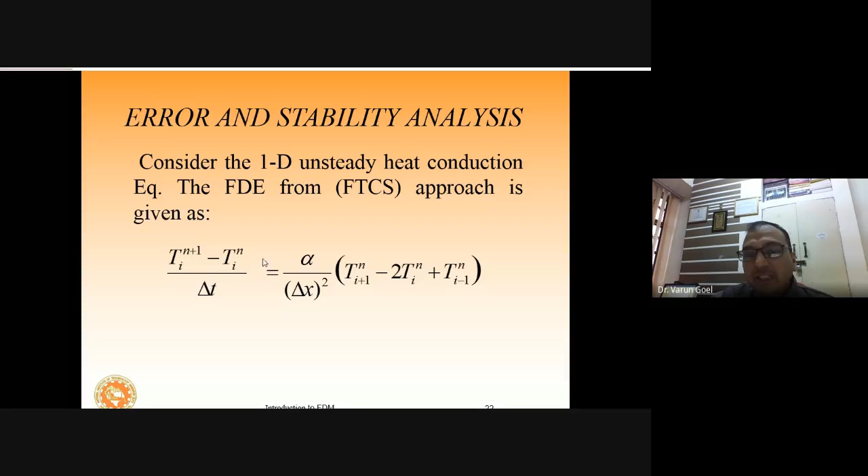Now, when we talk about the implicit approach, what do we have to do? All these values are at the n plus 1th level. N plus 1, n plus 1, n plus 1, and this is n plus 1, the same thing. And we are only having one known, that is Ti n. So we know only this single value, but we don't know all these three values.

So with the help of this, we are trying to calculate the value, but with the help of only one known, we are not able to find out this. Similarly for this 3, with 1 you cannot get 3. We know this, we cannot get this 3. With this 3 we cannot get this, and similarly we cannot get this.

So now we have to simultaneously solve these equations. And when we have to simultaneously solve these equations, we have to solve a certain matrix problem. But in the explicit case, we know these 3 values, and with the help of this we can get the 1 value. So this is the difference here.

So I think that's clear. Is it clear to Sukant Naik?

Okay, one more question is, which software can be used for error analysis? It has been asked by Fanindra Mishra. Basically, for which type of error? Are they interested in the uncertainty of anything, or something else?

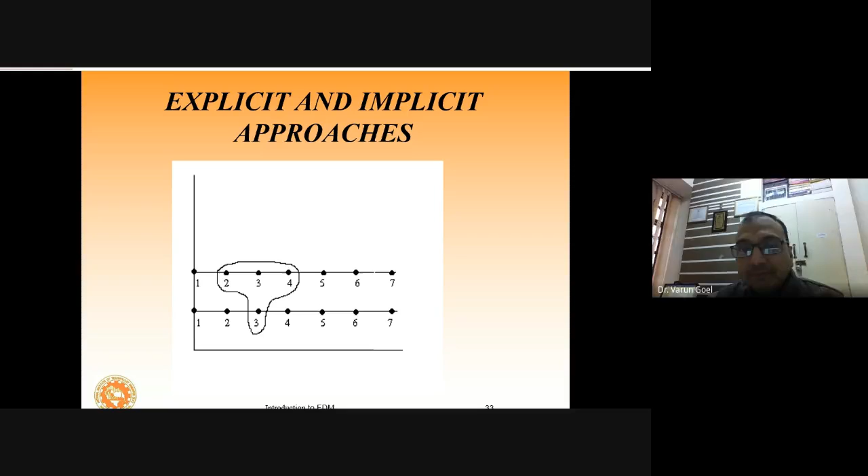Close. Yes. So thank you, Dr. Varun, thank you very much for such a wonderful and informative lecture on governing equations of fluid dynamics. In this lecture, he discussed fundamental equations of fluid dynamics and analysis approaches very well. He explained different models of flow, whether we can go for integral or differential approach as per the problem formulation. He covered the basics and usefulness of the continuity equation, momentum equation, Navier-Stokes equations, and conservation of species. He discussed the need for numerical methods, analytical, experimental, or computational. So thank you, Dr. Varunji, thank you so much for such a nice talk.